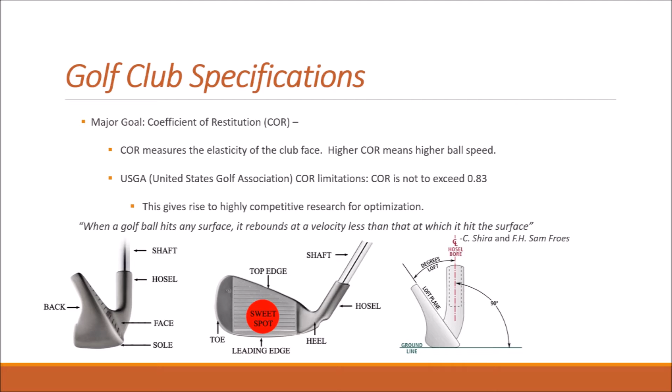The golfer aims to transfer as much energy from the movements of his body into the ball. The coefficient of restitution is the efficiency of this transfer. The USGA limits a club's COR to 83%, giving birth to a highly competitive search for optimal material, design, and the manufacturing of the highest performing golf club.

There are two predominant processes involved in making all types of golf clubs. Most golf clubs used by the average golfer are created using investment casting. In contrast, drivers and high-end irons used by elite golfers are created by a forging process. There are variations that exist between competing companies and the exact processes they use.

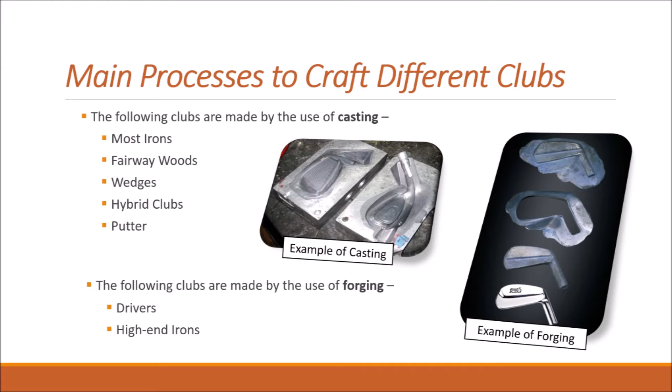The process begins with a proprietary mold representing the outer shape of a golf club. A unique mold is required for each specific club to capture the different loft angles. Therefore, a typical set of irons will have 8 to 9 different molds.

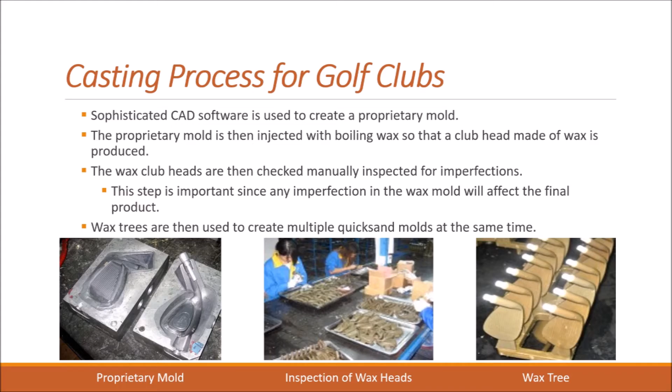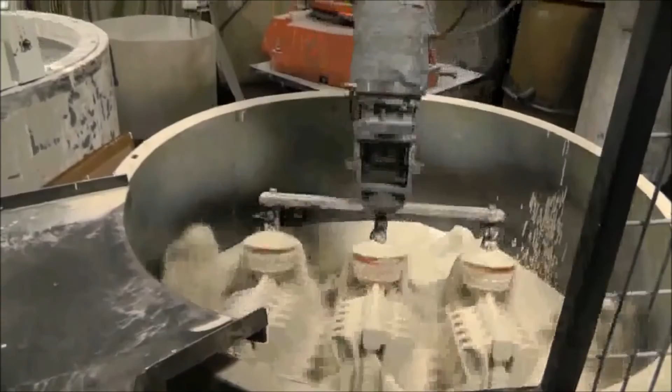This video shows a wax tree being dipped multiple times into a quicksand slurry. The typical slurry is a quicksand mixture because of its ability to withstand the extreme temperatures and the ability to form perfectly smooth layers that capture intricate details. The layer is then dried in a very controlled environment and repeated multiple times. Each layer is thicker than the last to create a sturdy shell.

The wax-quicksand combination is dried up to 5 times before entering the steam oven. All of the wax melts and can either be siphoned out or poured out of the mold. What remains is the hollowed shell of the quicksand containing the exact shape of the club.

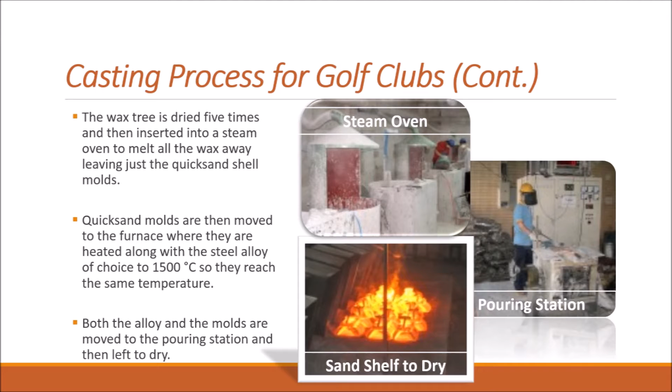The quicksand molds are then heated simultaneously with the desired steel to roughly 1500 degrees Celsius. This prevents cracking and shattering of the mold from the shock of the steel's high temperature. Once the quicksand reaches the proper temperature, the steel is poured into the mold and then left to dry. The timing and efficiency of movement is vital to the pouring step to ensure continuity of material through the club head. Once dried, the quicksand is removed and the steel club heads remain.

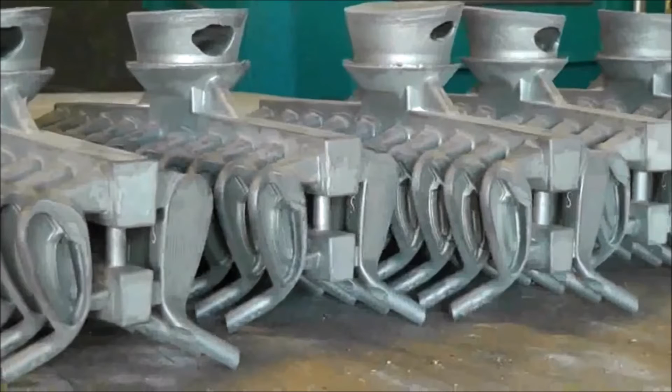Unfinished club heads must be carefully removed from the tree before being polished and either sandblasted or glass bead blasted, depending on the manufacturer's specifications. The finishing process is the final step to ensuring the quality standards set by the manufacturer and the USGA are met.

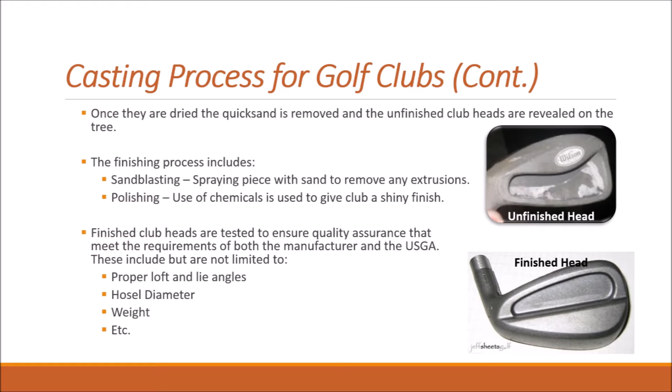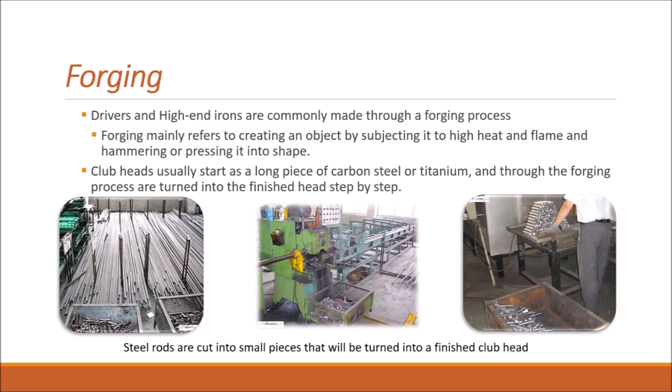While some club heads are made through the casting process, most drivers and high-end irons are made through forging. Forging mainly refers to creating an object by heating a metal plate to high temperatures, then pressing it into shape. Club heads start as long rods that are cut into small pieces, which are subjected to the forging process to make the finished product. In the forging process, different presses are used to form the metal. For steel pieces, 800-ton presses are used, while titanium pieces are normally shaped with 5,000-ton presses.

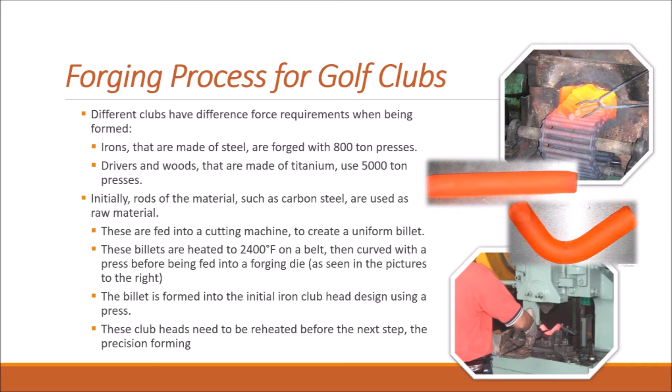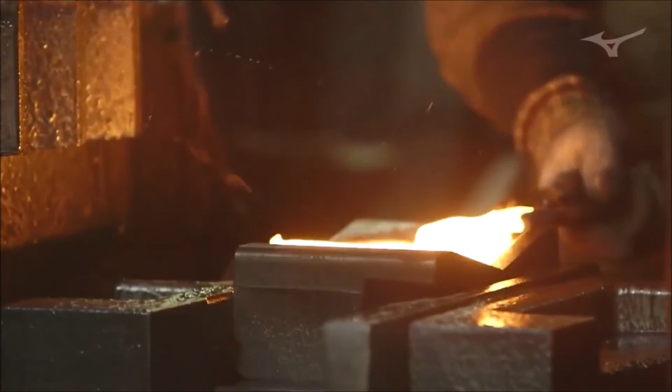The initial rod piece is cut into billets, which are heated and pressed before a forging die is used. The initial head design starts to be seen. In this clip, a worker is seen using a press to bend the molten billet. He is very careful to avoid touching the billet and the press while it's in use. At this point, the head is too heavy, which means that the press must be used to make it more compact and to remove the extra flashing material from the sides of the club head.

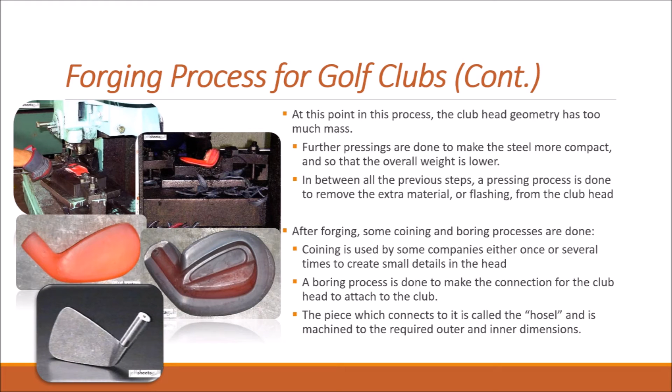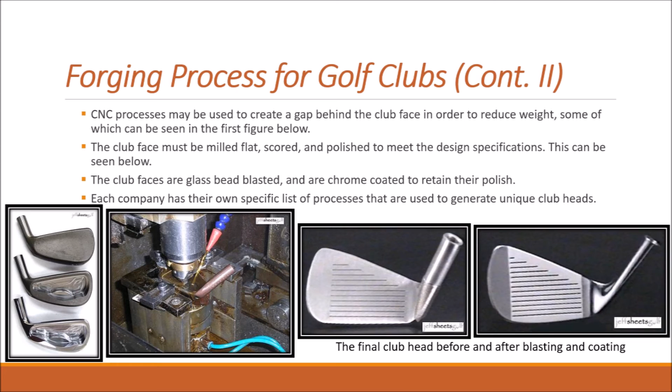After the forging process is complete, some finishing processes are done. Coining and boring are used by companies to make small detailed marks in the piece and to make the connection between the hosel and the club. Other processes like CNC milling may be utilized in order to make unique gaps in the head and to reduce overall weight. To finish the piece, the face of the club is milled flat. Score marks are drawn into it, and then the club is polished through sand or glass bead blasting. A chrome finish is obtained after polishing.

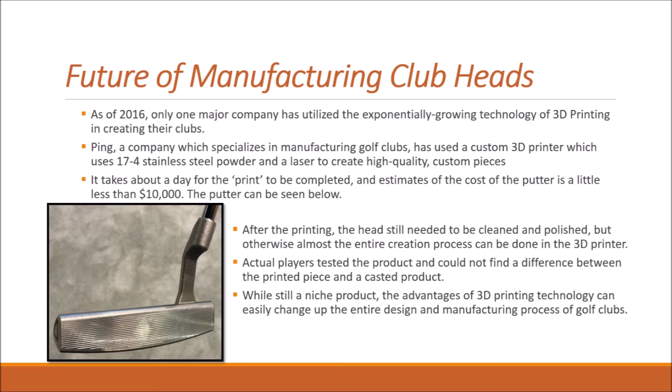Over the coming years, 3D printing costs will go down, which should make the process more readily adopted by the golf club industry. The possibilities for 3D printing clubs are endless. Professionals and businesses could create their own clubs that fit their playing style, and companies can replicate clubs to amazing precision. 3D printing can easily revolutionize the golf club head creation process, and once printing times go down and more materials are available, the only limit to a club head will be the designer's creativity.